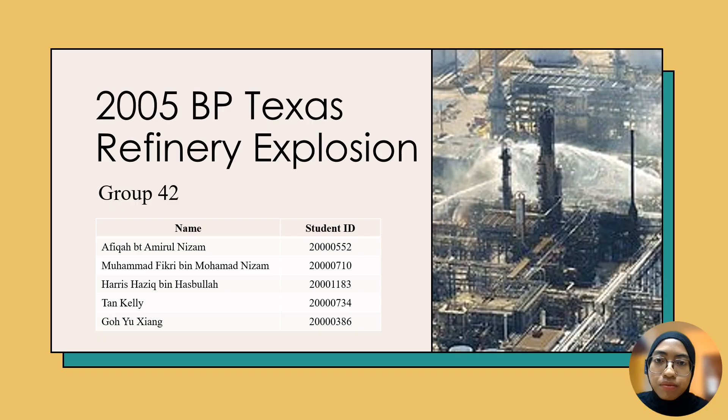In 2005, the BP Texas City refinery experienced a devastating explosion, marking one of the worst industrial disasters in U.S. history. The incident resulted in 15 fatalities and over 180 injuries, highlighting the critical safety failures. So, what caused this disaster? Investigations pointed to serious safety failures, mismanagement, and outdated infrastructure that had long been neglected.

The immediate trigger was an overfilled raffinate splitter tower, which led to a dangerous hydrocarbon release. This gas ignited, causing a massive explosion that devastated the area. BP acquired the refinery from Amoco in 1999, but safety violations had already been a long-standing issue. Unfortunately, these concerns were not adequately addressed.

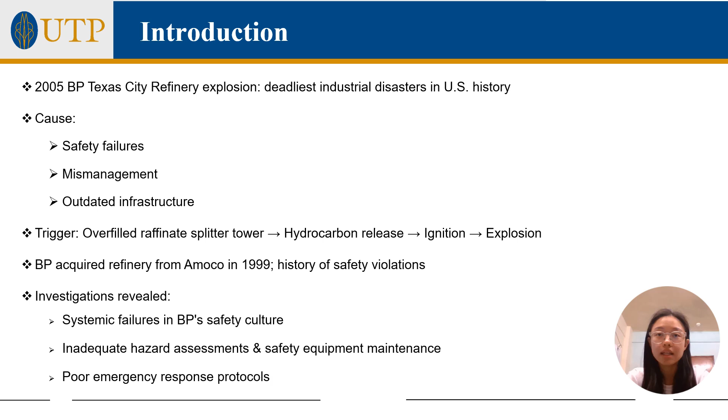Investigation by the U.S. Chemical Safety Board uncovered systemic failures, including poor safety culture, inadequate hazard assessment, and outdated emergency response protocol. I'm sure you are curious about what happened during the day. So, on March 23, 2005, BP attempted to restart the isomerization unit after a scheduled maintenance shutdown. The raffinate splitter tower, which is a key component of this unit, was overfilled due to faulty level indicators, and also the high alarm was not functional.

A large volume of flammable liquid was sent into the blowdown drum, which is actually designed to handle vapor but not liquid hydrocarbons. It overflowed and released a dense cloud of highly flammable vapors into the surrounding atmosphere. Then at 1:20 p.m., a nearby pickup truck ignited the vapor cloud, causing a massive explosion.

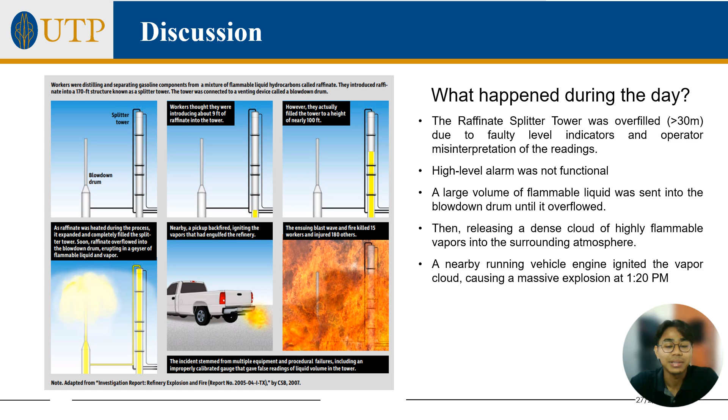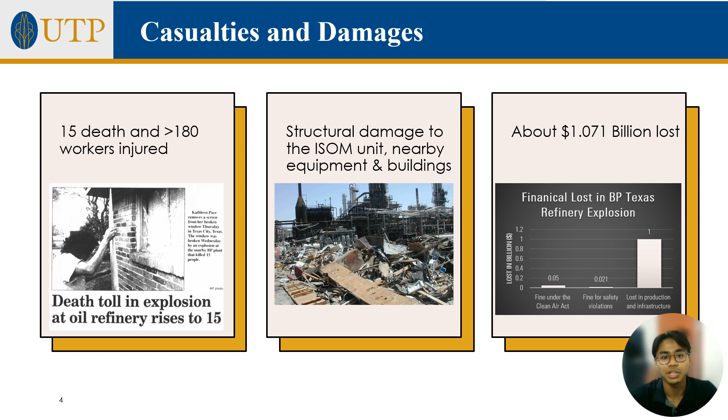There were 15 fatalities and injuries to over 180 active workers, making it one of the deadliest industrial disasters in the U.S. refining sector. Next, the explosion caused extensive structural damage because the blast radius extended over several hundred meters. Moreover, BP lost over 1 billion USD in regulatory fines, production, and damages.

Hello, my name is Yu Xiang and I'll be talking about the technical failures. One of the major failures was the overfilling and overheating of the raffinate splitter tower. Operators ignored the high-level alarms, leading to unchecked hydrocarbon accumulation. By 3:16 a.m., the liquid level exceeded 137 feet, flooding 57 out of 70 trays. Additionally, the reboiler overheated the system at a rate of 75 degrees Fahrenheit per hour, far beyond the safe limit, causing a dangerous pressure rise from 20 psi to 63 psi.

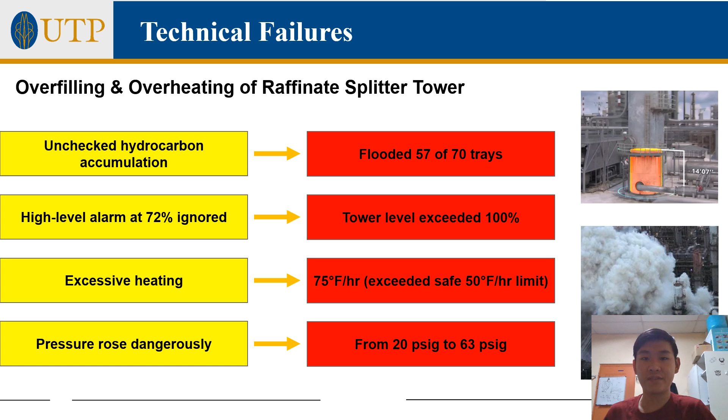Next up, on the blowdown drum failure, the facility relied on a 1950s era blowdown drum, which is very outdated. This vented flammable hydrocarbons into the open atmosphere, instead of a safer closed flare system. At 1:20 p.m., a running diesel truck ignited the vapor cloud, resulting in a massive explosion equivalent to 3 tons of TNT.

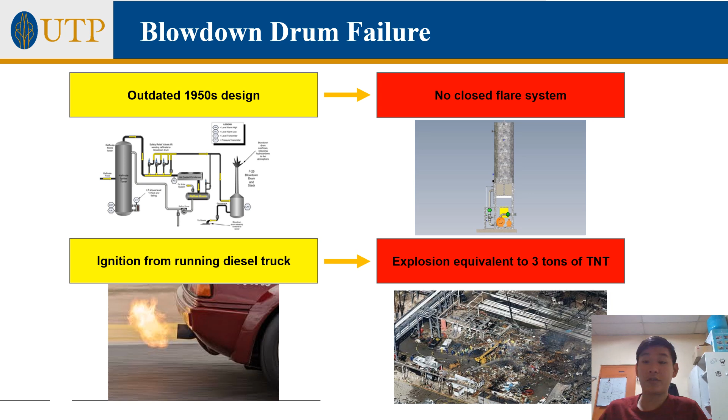Now, the disaster could have been prevented. Multiple alarms had been triggered, and yet operators ignored the high-level alarm. A backup alarm at 78% failed due to a sensor malfunction. Despite the pressure rising dangerously high, no emergency shutdown was activated. Even worse, the emergency shutdown system was bypassed, leaving no safeguard to stop the escalation.

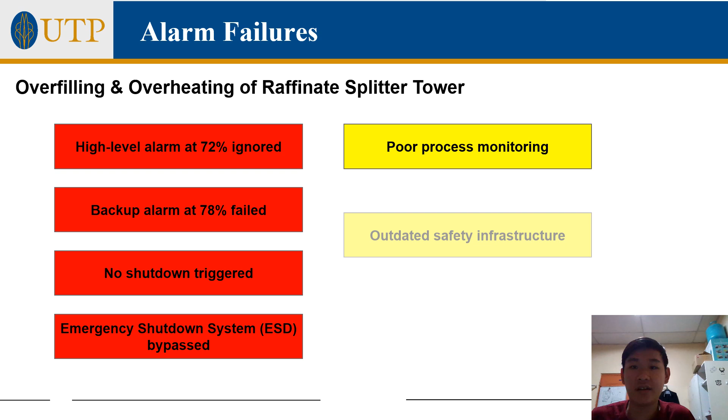In this case, the BP Texas City explosion is a tragic example of how human errors, poor processes, and outdated safety infrastructure could lead to disaster. This incident highlights the critical need for stricter safety procedures, automated shutdown mechanisms, and proactive hazard identification to prevent future tragedies.

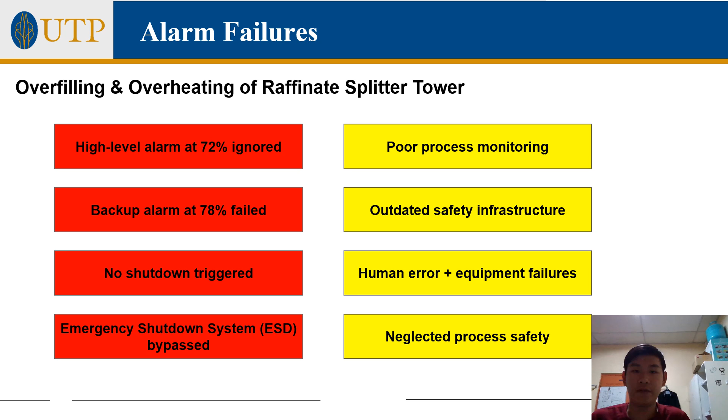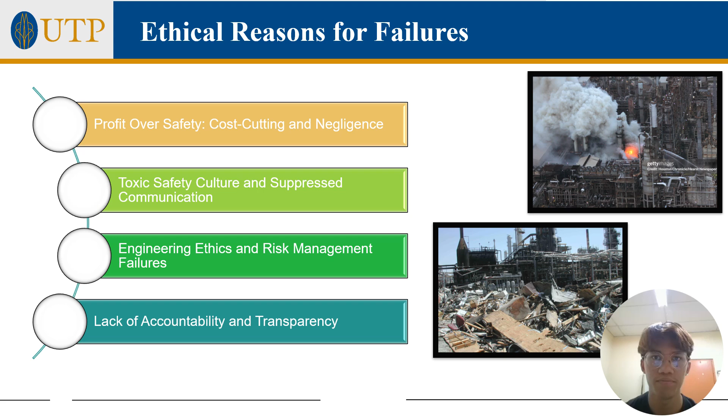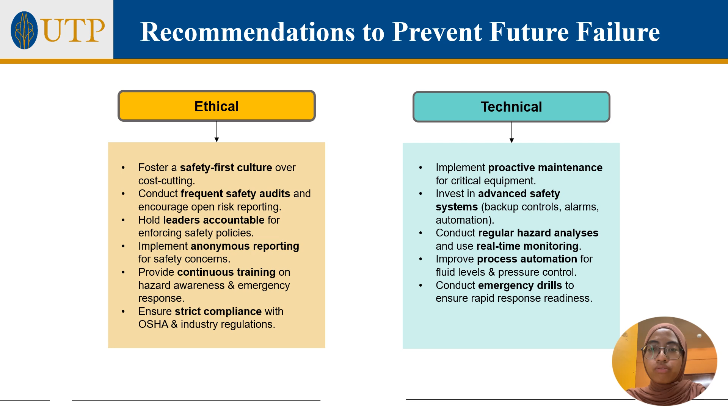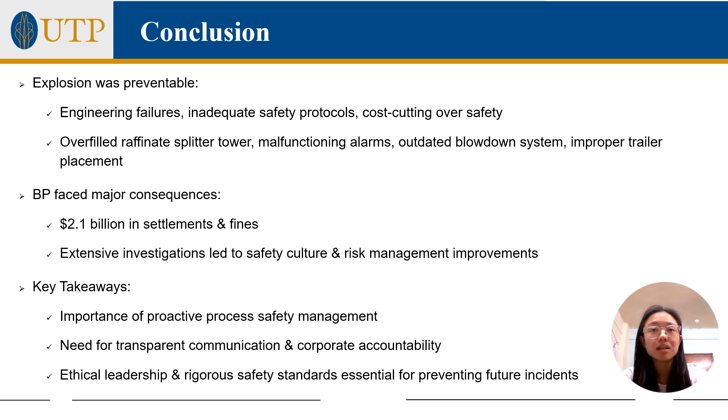The key takeaway here is that proactive process safety management and corporate accountability are crucial. Ethical leadership and strict adherence to safety standards can prevent future tragedies like this one.